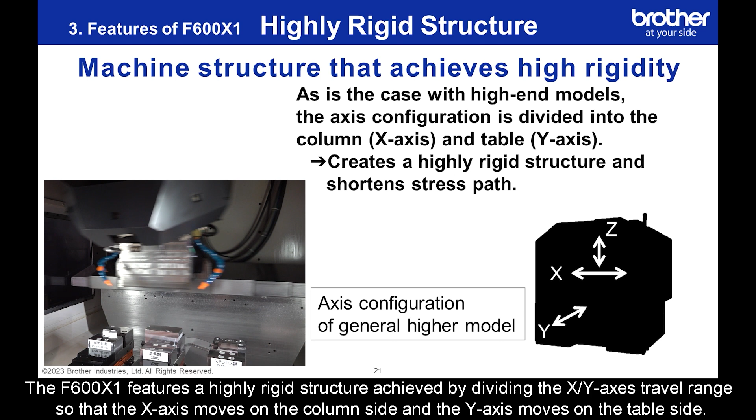The F600X1 features a highly rigid structure achieved by dividing the x-y axes travel range so that the x-axis moves on the column side and the y-axis moves on the table side.

The stress path shown in the figure indicates the distance from the machining point to the spindle. Deformation of the machine is less as the stress path is shorter, so we strive to shorten this stress path more than that of general BT30 machining centers to achieve high rigidity.

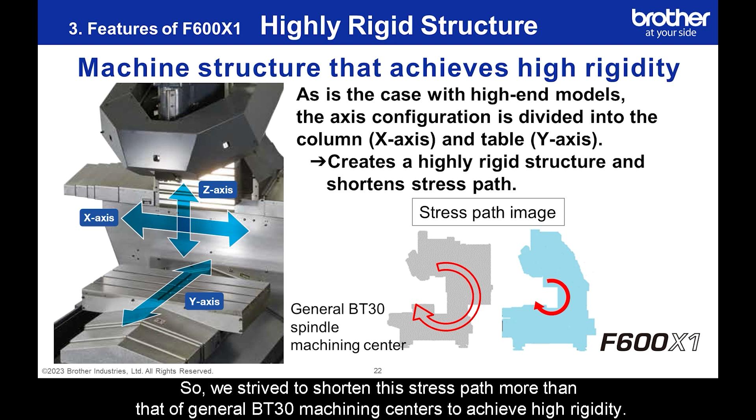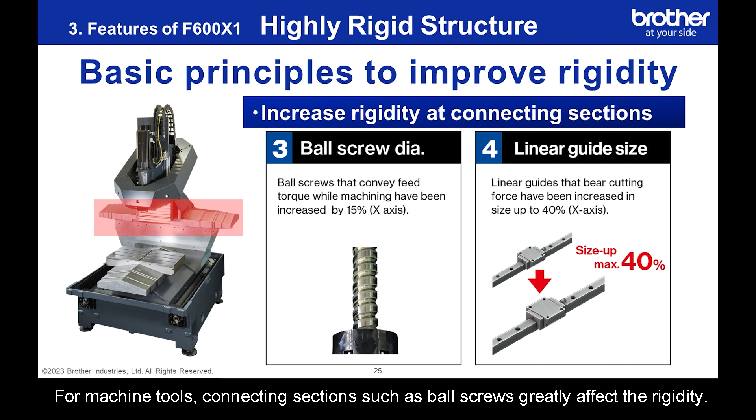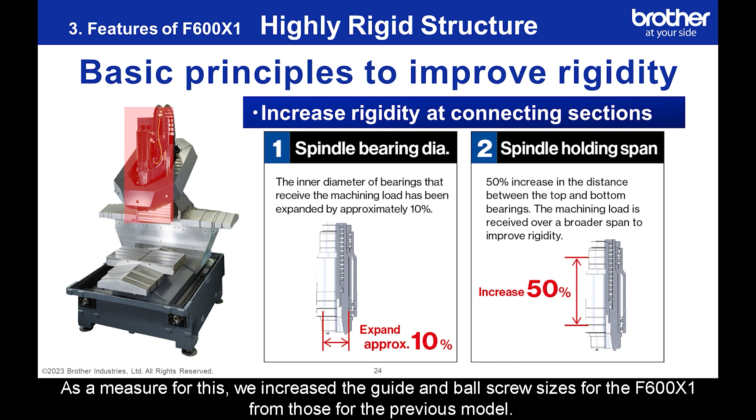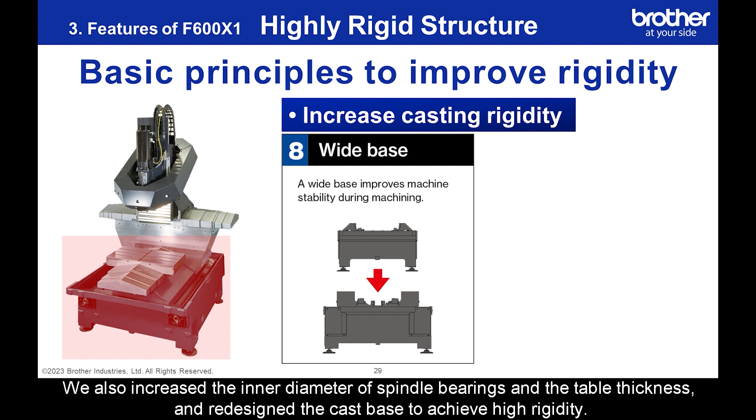To enhance the rigidity, other structural improvements have been made to the F600X1. For machine tools, connecting sections such as ball screws greatly affect the rigidity. As a measure for this, we increased the guide and ball screw sizes for the F600X1 from those for the previous model. We also increased the inner diameter of spindle bearings and the table thickness, and redesigned the cast base to achieve high rigidity. As a result, the total machine weight has increased by almost 1 ton compared to the previous model.

The F600X1 high-rigidity model enables stable machining of difficult-to-cut materials. As shown in the graph, the F600X1 can minimize vibration more than other models in a wide range of machining conditions due to its highly rigid structure. This makes machining under higher conditions possible.

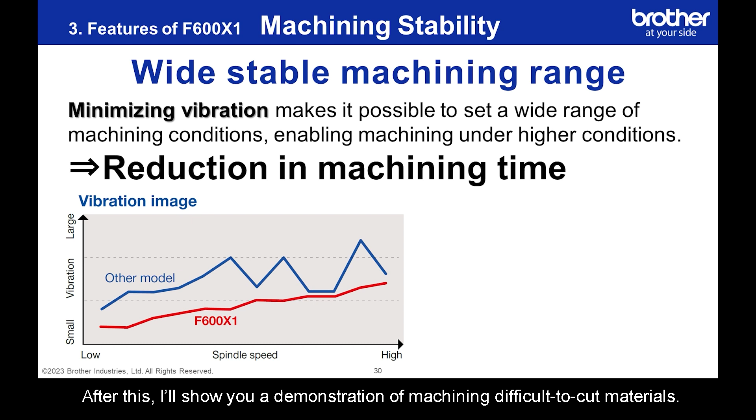After this, I'll show you a demonstration of machining difficult-to-cut materials. Using a Phi 80 facemill, stainless steel and pre-hardened steel are cut to 56 mm in width and 2.5 mm in depth. You can confirm stable cutting performance and sound even under these conditions.

The next demonstration is cutting using a Phi 10 end mill. Difficult-to-cut materials are cut to 3 mm or 1.5 mm in width and 20 mm in depth. Stable performance is achieved even for cutting under L/D equals 2D conditions where vibration tends to occur.

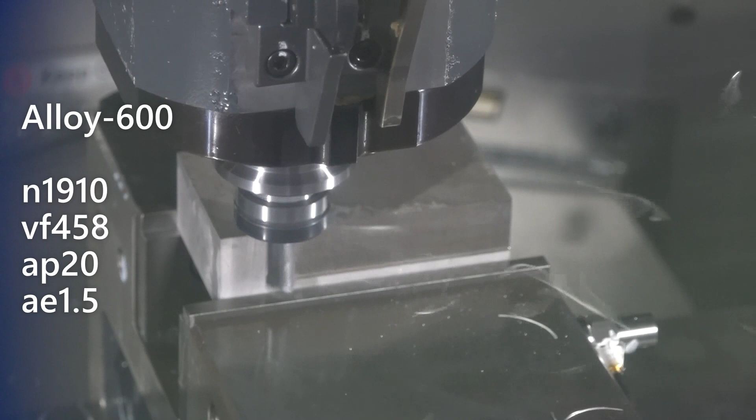Replacing BT40 spindle machines with our F600X1 can greatly reduce power and air consumption and machining time. This leads to reduction in CO2 emissions and electricity costs at customers' plants. These graphs show the results of measurement. When the BT40 spindle machine and the Speedio are run on the same machining program, there are great differences in cycle time, power consumption, and air consumption.

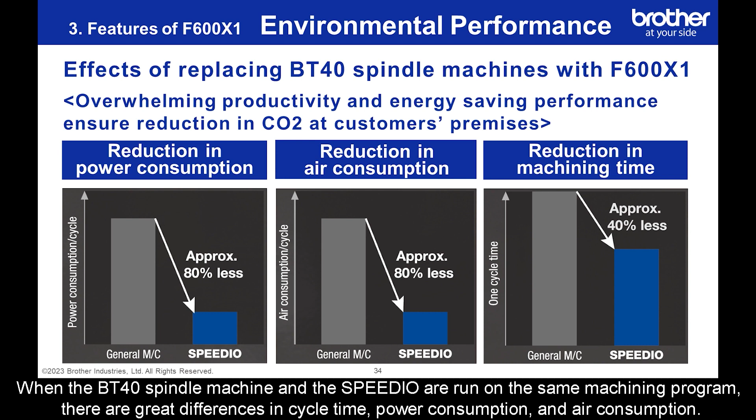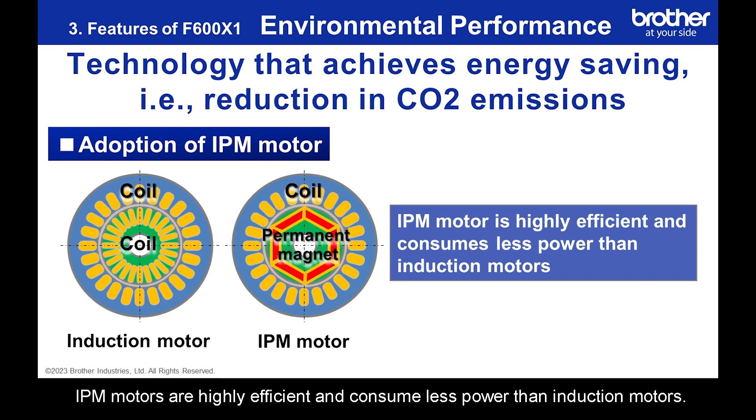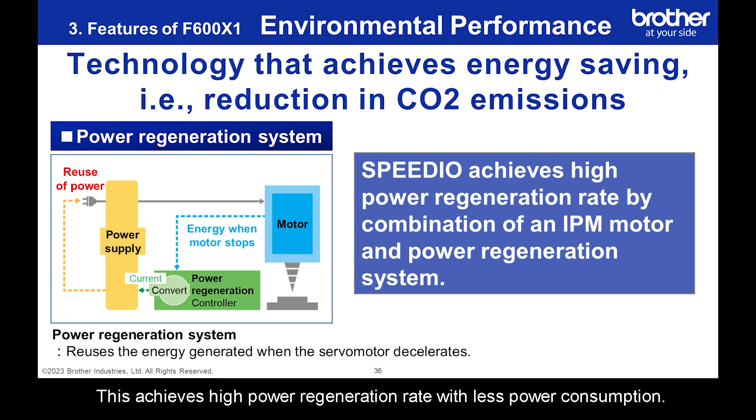I'll now move on to describing technologies that achieve reduction in energy consumption. While general machining centers use an induction motor for the spindle, the Speedio uses an IPM motor. IPM motors are highly efficient and consume less power than induction motors. A power regeneration system is incorporated in the Speedio so that the energy generated when the motor decelerates is collected to be reused. This achieves high power regeneration rate with less power consumption.

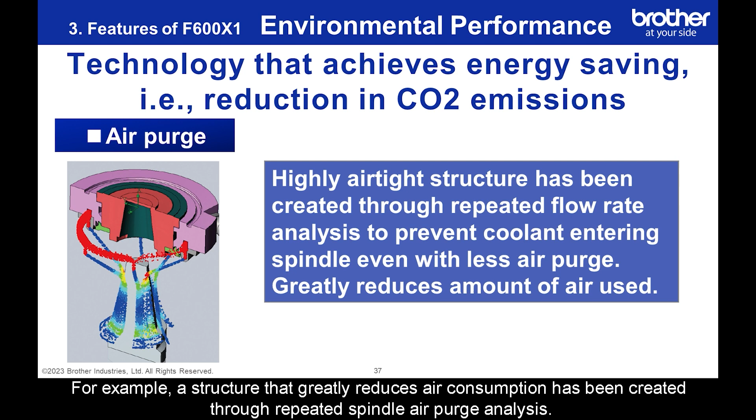Measures to reduce air consumption have also been implemented. For example, a structure that greatly reduces air consumption has been created through repeated spindle air purge analysis. Spindle air blow is performed only when required by discharging sufficient air at the best time.

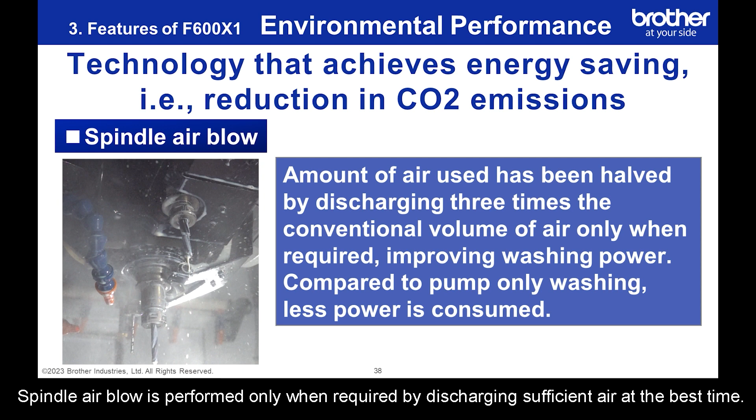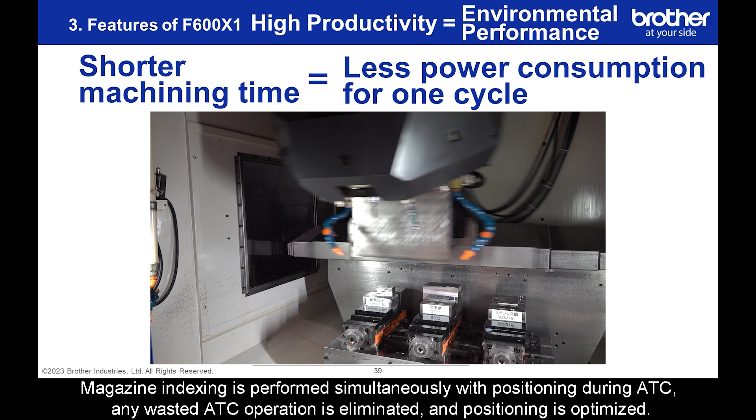I'll now describe the high productivity. Both the Speedio machine and NC have been developed in-house to thoroughly eliminate any waste. Magazine indexing is performed simultaneously with positioning during ATC. Any wasted ATC operation is eliminated, and positioning is optimized. These technologies, based on machine-controller integrated development, have achieved high productivity. High productivity means finishing workpieces in shorter time, and this reduces operation time, leading to less power consumption.

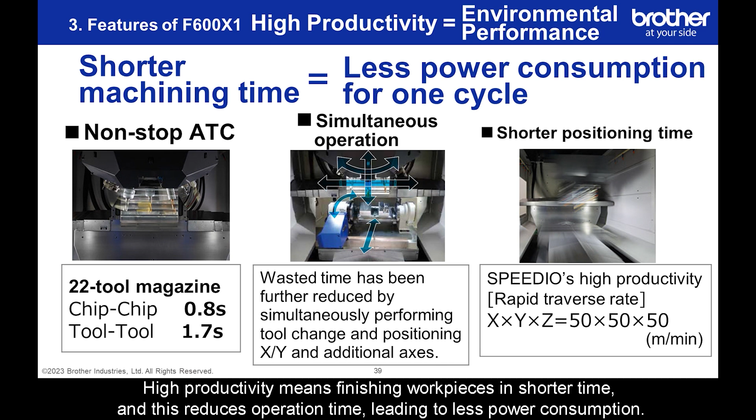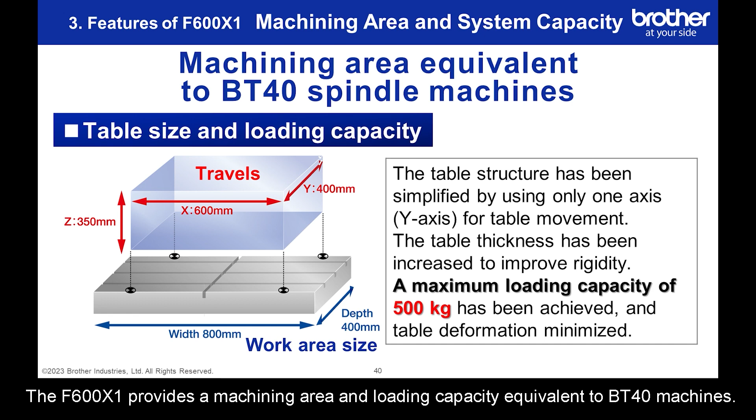I'll now describe the machining area of the F600X1. Travels are 600 mm for the X-axis and 400 mm for the Y-axis. The size of the table work area is 800 mm in width and 400 mm in depth, and the maximum loading capacity is 500 kg. The F600X1 provides a machining area and loading capacity equivalent to BT40 machines. While maintaining the conventional compactness, the door opening width of 845 mm is secured for the machine width of 1800 mm.